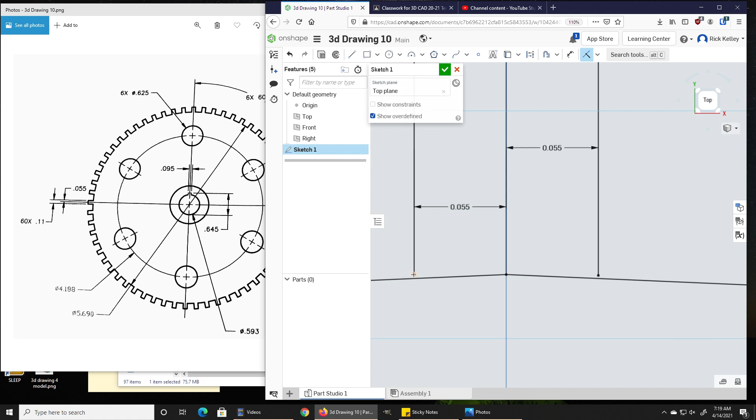I am going to use my coincident constraint to make sure those ends are on the circle. I know it doesn't look like they just moved, but they are black. Onshape will draw a circle as a series of small straight lines. If you zoom in far enough, it will stop looking like a circle. But it really is on the circle. Okay. Now I'm going to trim. I don't need the rest of that outside circle. I've got one tooth.

Let's go ahead and use our pattern tool. If I can find it with all the tools collapsed like this. There it is. Circular pattern. Select my objects. That. Select my center point. It already has one, which is nice. Tell it how many we want. We're looking for 60. How do I know? I know. There it is. 60x.

I'm not getting a preview, which disturbs me. I'm just going to click. There we go. Now the teeth started showing up. And I am just going to accept that for now to get rid of some of those dimensions. Step back and take another look. Okay, there's a lot of trimming that needs to go on now.

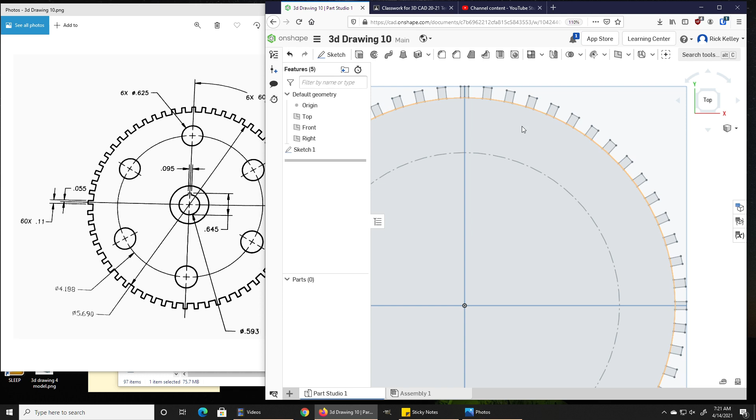Here's why. The circle at the base should be trimmed out so that this entire gear surface can be extruded at once. If we don't do that, all of those individual teeth are going to need to be selected. I don't know if it saves any time or not. I'm still going to have to go around and select each and every one of those lines. Maybe I'll leave it and I'll select the teeth during the extrusion process and see if that feels any slower.

Again, there are a couple of ways you could do this. No way is exactly right. It just might be a little faster to go one way than the other. Let's go ahead and put one of these circles in place. There are 6 of them, diameter of 0.625, and it's going to be right at the intersection of this circle, this center circle, and the vertical line running up from the center there.

So I'm going to double click my sketch again, start my circle command. I'm going to make sure it's here and there. I want, yep, the vertical intersection with that circle. Diameter of 0.625.

Looks good. Let's go ahead and use the pattern tool again, because why create more of those if we don't have to? It has the right center point already, so I don't even have to worry about that. I just have to change my number, if I can find my number. There's a 3x somewhere.

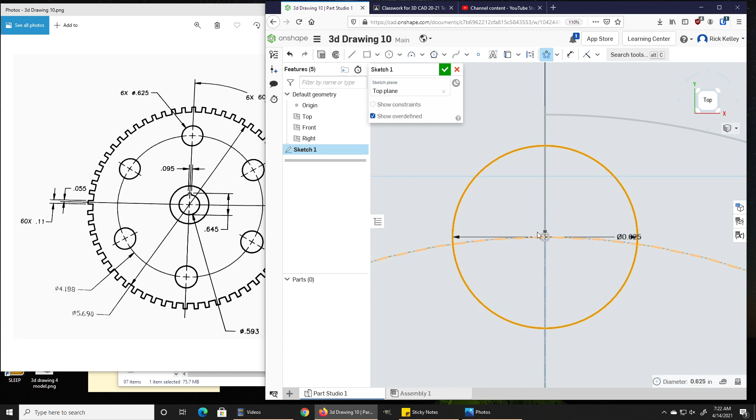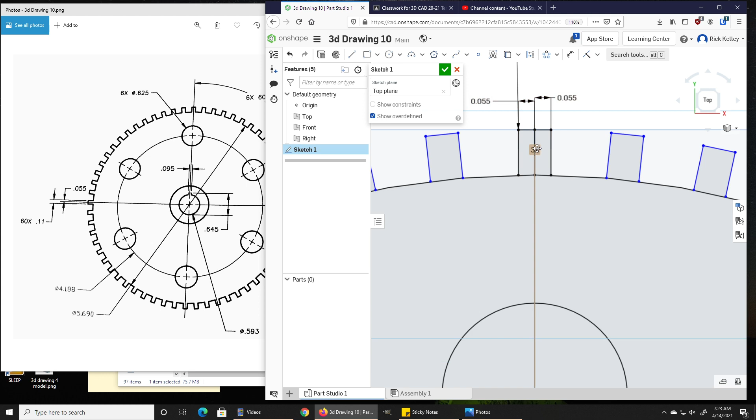Alright, this tool doesn't always show every dimension. I can't find it, so I'm just going to click. We're going to lock in the 3. And I'm going to, there it is. Come on. Where is the number? Wow. I really can't find. Oh, there it is. It's hiding. Too many dimensions. Alright, 1, 2, 3, 4, 5, 6 is what we're looking for. That's better.

Okay, last thing we need, a couple of circles and then that little keyway slot right there. So, back to the circle tool. Make sure we're on that origin. Okay, my computer's running kind of slow. Not sure what that's about. And let's look for a diameter. Diameter here, 0.593.

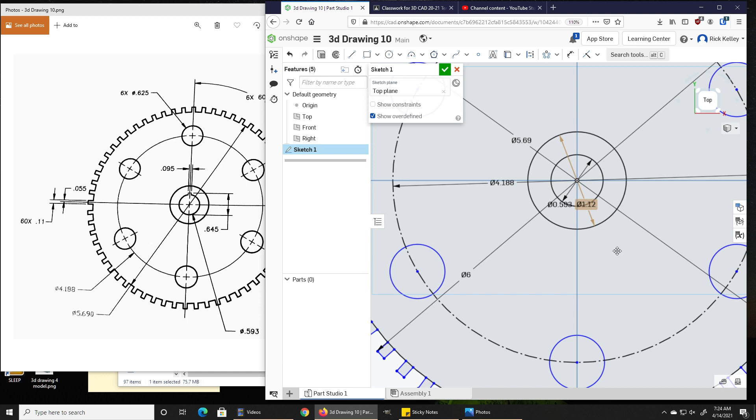And let's do another one. Yeah, you can see how slow my computer's running right now. Looking for an arrow somewhere that's touching this outside circle. Not finding it. So I'm going to look at the side view where we've got a couple of lines touching it instead. 1.12. There we go. Okay, it's just getting a little bit messy. Let me pull those off to the side.

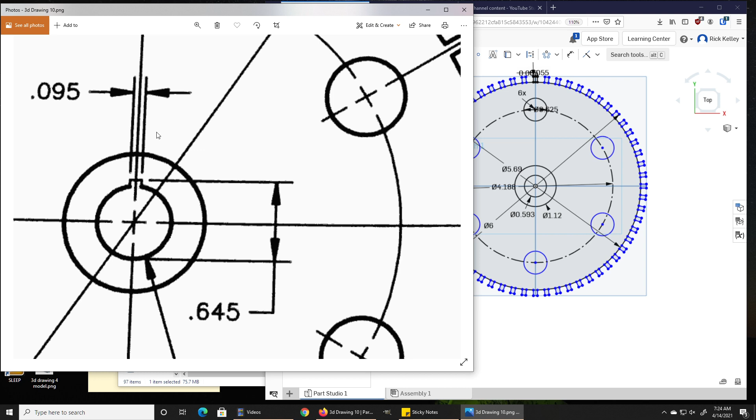Let's work on this keyway next, which is, whoops, not what I want to do. I want to zoom in. There we go. Which is 0.645 from the bottom of the circle to the top of the keyway. The keyway is 0.095 side to side, and it's symmetrical. You got that center line running right through it.

So let's come over here and toss a line up. No, I'm not going to toss a line up. I'm going to put a line across. Here's why. Oh, actually, I should have mentioned that. 0.095. Okay, now what I'm going to do is I'm going to add a point. Make sure the point is on the middle. And then I'm going to make my coincident constraint. That midpoint should be on this line.

Now it's perfectly centered. Now I'm just going to throw some lines down. Make sure it says vertical and coincident. Do the same over here. Vertical and coincident. Actually, that's perpendicular, but that'll work too. Now let's just dimension the distance from the bottom to the top. So my dimension tool, whoops, can't do that. I don't have anything to measure from.

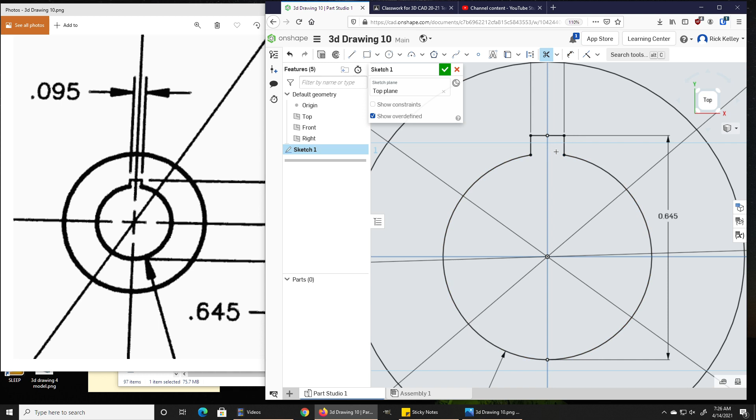Let's put a point down there first. Should be coincident and vertical. There we go. Now I've got a point I can measure from there to there. And that should be 0.645. I am going to go ahead and trim out that inner part of the circle there. And everything here is set up and ready to go. I'm going to go to a 3D view. And I'm going to start extruding.

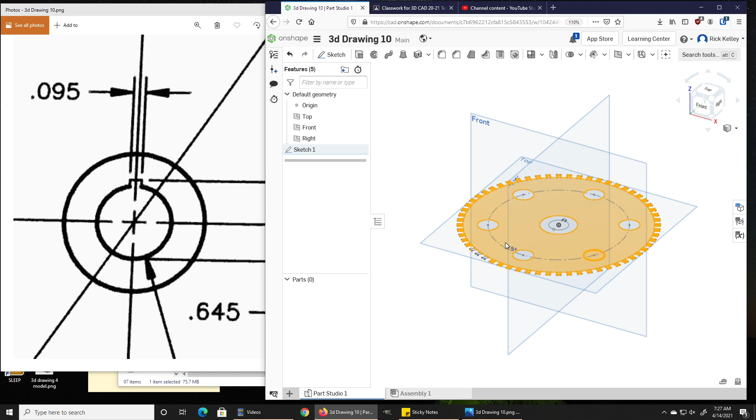I'm going to take this. Let me see, can I get all of these? I can. At least I think I can. Let's try this. I'm being careful not to accidentally select one of the drawing planes or any of these holes in their entirety. I apparently messed up because I got one. There we go.

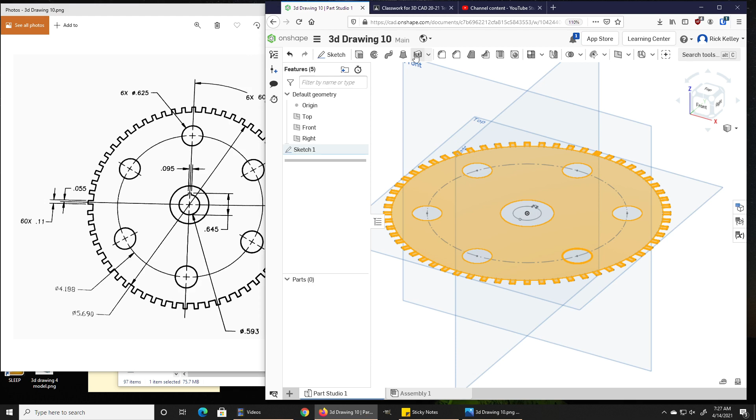Alright, all of that is going to be the same thickness. Well, what is that thickness? Over here we're looking at 0.31. So let's go ahead and extrude 0.31 and accept it. Look at that. I did not have to go in and trim all those circles out. So it actually was faster to do it this way.

Typically I go in and trim those circles out when I create a drawing like this. So I guess I will stop doing that in the future because that is a bunch of extra time I don't need to spend. Alright, we're not done. We still need to extrude the center pieces here. How far? They come up for a total of 0.675. So if I grab that and extrude 0.675, I don't need to do the hole because I extruded around it, so it just stayed a hole.

And the last thing I need to do is add that fillet with a radius of 0.12. So I'm going to grab the fillet command here. Grab that intersection and come in and give it a radius of 0.12. And there you go. This drawing is done. Let me turn off the drawing planes. Let me hide sketch 1 again. That's what you're creating.